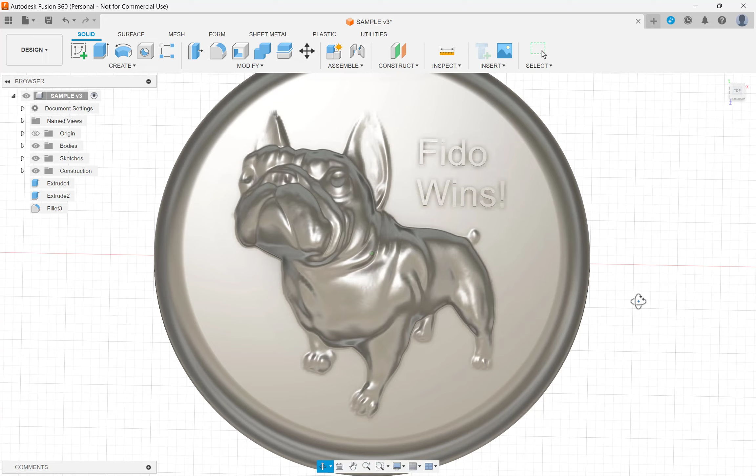How freaking cool is this, guys? If you want to incorporate amazing relief models into your Fusion 360 projects as a solid body that you can use as part of any other design, this is the tutorial for you.

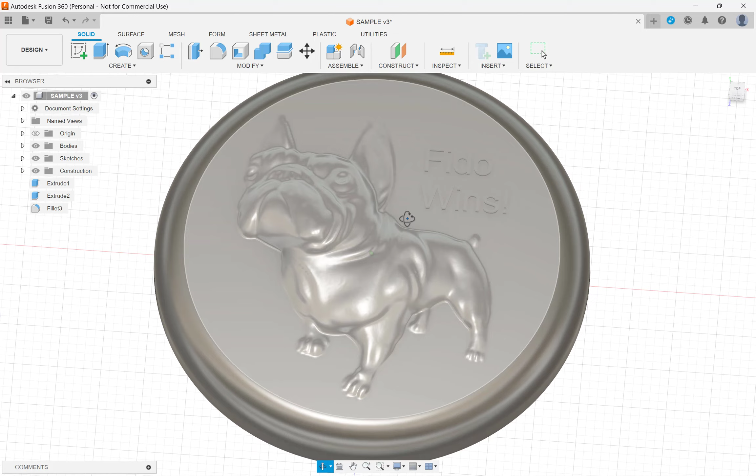In this tutorial, we're going to learn how to generate the relief model from Relief Maker, and we're going to bring that relief into Fusion, convert it to T-splines, and then use that to incorporate that into some other design that we have going on so we can then mill it or 3D print it. Let's get started.

Okay, so here we are in Relief Maker. We've opened up the model that we're going to want to bring into Fusion from a relief perspective later. And we're going to kind of rotate it and position it to where it's interesting and like we want it to be. And the first thing to note is you don't want the model to be right next to the edges. And in fact, might want to make it a pretty good amount. The reason is when we generate a relief, everything that's around it's going to be flat. And we're going to use this to our advantage later.

So if you zoom the model way in, you're not going to have a lot of flat areas around it, and that's going to be a problem for this workflow. So give it some breathing room. And the next thing is to make sure that the output width and height are at the absolute maximum of 1,000 and 1,000. And this is a dense mesh in terms of Fusion 360.

And as a result, 1,000 by 1,000 is the absolute maximum, and it's going to take a lot of processing time down the road. So if you can get away with lower output widths and heights to get the results that you want, definitely do that. But we're going to go with 1,000 by 1,000, and let's press Generate Relief.

And we'll look at it from the side, and this is looking pretty good, but we want some of this detail to be a little bit more pronounced. So let's change this maybe to 85% height scale. We'll regenerate it. And that's looking pretty good. So at this point, we're done in Relief Maker.

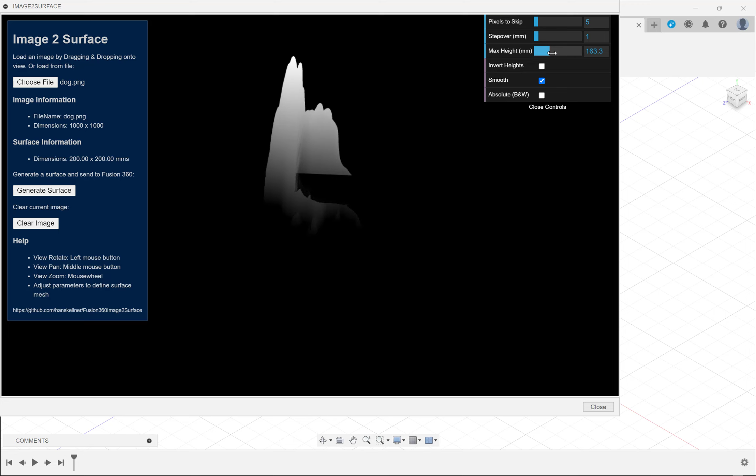So we'll click Choose File. We'll navigate to the Relief Output folder, and then we'll choose the image that we made. And we see that it comes in. So the first thing that you probably want to do is figure out how tall you want this to be. And changing that value, you can see kind of a preview. We're going to want this to be 35 millimeters tall.

The next thing that we want to do is kind of look at the pixels to skip and the step over values. If we just temporarily increase the step over, you can kind of see the mesh density that we're going to get as a result of this based on the pixels to skip. And so changing the pixels to skip effectively ignores some of the data in the image that we're using.

You don't want to have a 1000 by 1000 image with 0 pixels to skip. You can kind of just intuitively sense this insane mesh density that we're going to get. And this is going to make processing later extraordinarily time consuming. So either use a smaller input image or make sure that you skip enough pixels to where the mesh density is not totally out of control. In our case, maybe we'll choose 3 as the pixels to skip.

And then once we've chosen the pixels to skip, which effectively controls the mesh density, we want to figure out how big this thing should be. So you'll notice over here, we have our dimensions. This is the output size that we're going to get in millimeters. And as I change step over, the output size decreases.

So one thing to be aware of is that you may be tempted to believe that the dimensions are from the left side of what you can see to the right side. But keep in mind, this image is a square, and there's space around it that we're not really seeing represented on this image.

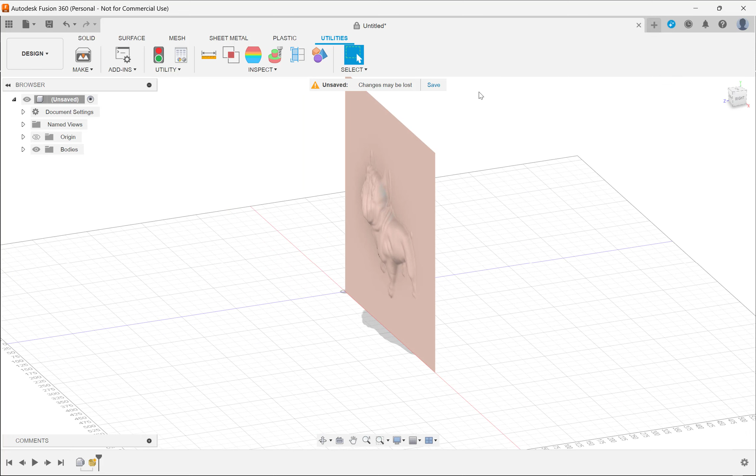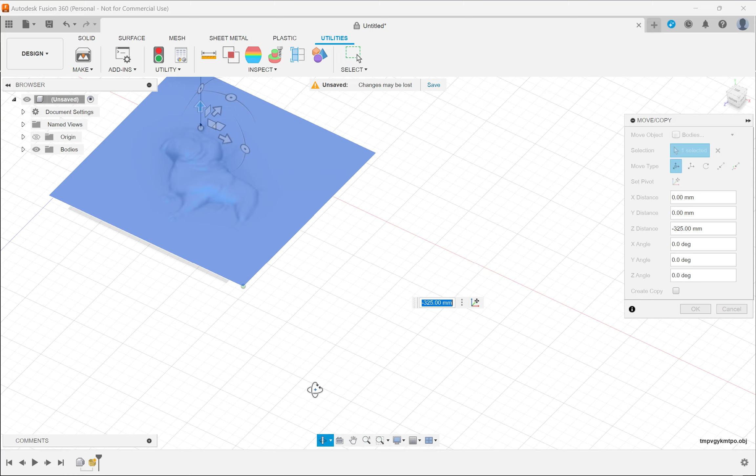And so the first thing that we want to do is kind of orient this in a more meaningful way. Let's say we're going to put this on a CNC machine. Well, we're going to be machining it from the top. And so we probably want to rotate this so that it's facing upwards. And for the workflow that we're going to use, and yours might be a little different, we're going to put this just above the ground plane. And we'll see why in a second. And then as the last step, maybe let's center it.

And we'll press OK. So now we have the mesh imported. We verified that its quality is good enough for the way that we're going to machine it. Otherwise, we might use a higher pixel density. And now we want to be able to do something with this thing. And the way that we're going to do something with it is by converting it to T-splines.

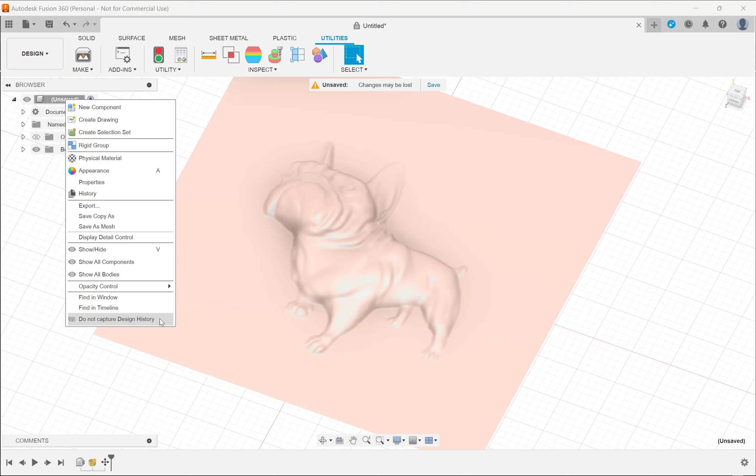So we're going to right-click, because we don't see the form menu up here. Right-click on the top node, and we're going to do not capture design history. Click Continue, and this is enabling the form object up here. So click that, and we're going to left-click our mesh to select it. Utilities, Convert, and then click Quad Mesh to T-splines.

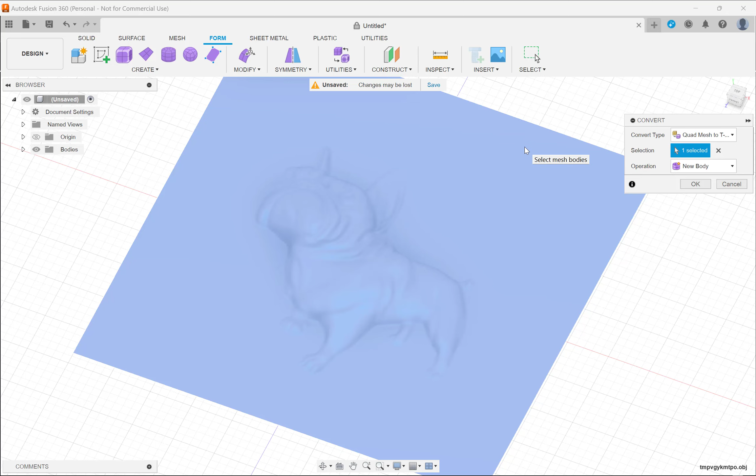Now, this is a process that can take a long time. If you're doing a 1000 by 1000 pixel image, the absolute maximum, and you have a skip pixels value of 1, so you're getting the full density, this step may very well take 45 minutes, right? So you want to use realistic values. In our case, it probably won't take super long because we have a skip value of 3. And so we're processing a much smaller image. So just be aware, this step is the one that can take forever, depending on how extreme of a resolution you're using. In any case, press OK and grab a cup of coffee.

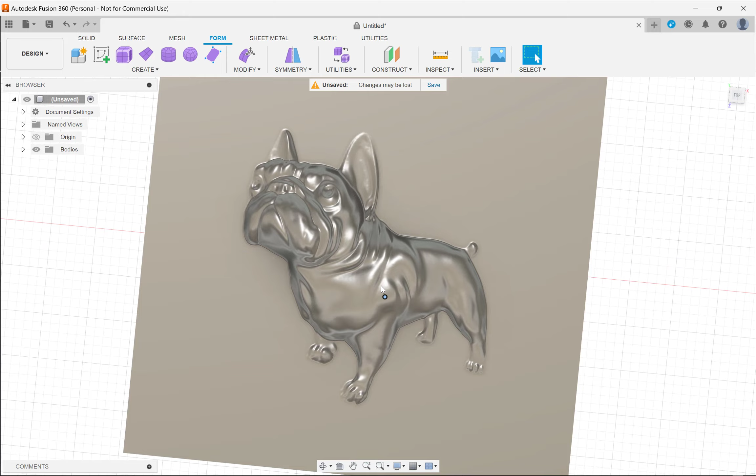All right, so this processing step, you can see it's now completed, probably took us 2 or 3 minutes, right? If you use a reasonable sized image or step over, it's not too bad. And we can see the quality is just outstanding. This is going to turn into something phenomenal. So now the question is, what do we do with this thing? Well, there's probably lots of different ways you can use T-splines, but the approach that we're going to take is perhaps the simplest. And we're going to use it as the basis to trim a solid body.

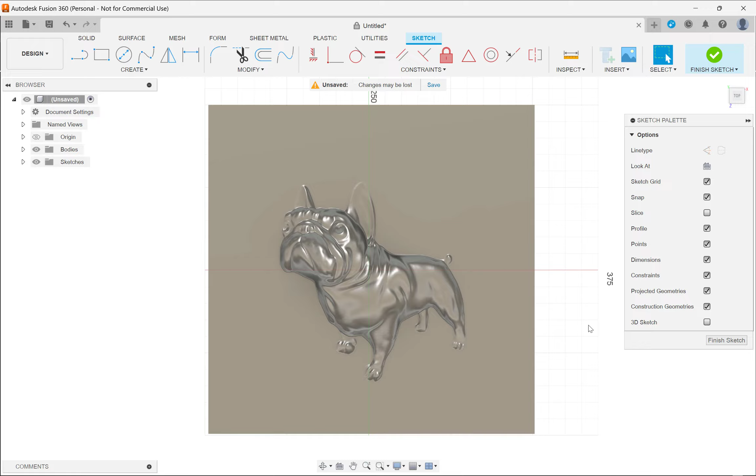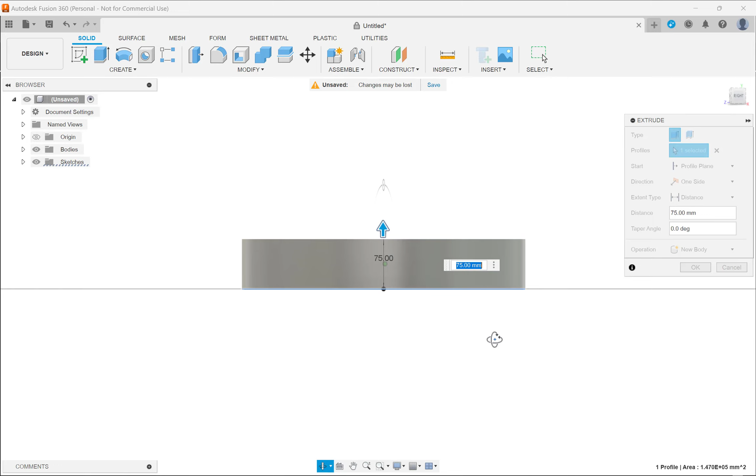And so we've entered sketch mode on that plane below. And we're going to create just a circle in our case, but you may be making a pendant or any number of different things. And we're going to sketch something, and we're going to extrude it past the top so that the entire relief is fully enclosed. And we're going to press OK. And at this point, we are very close to the magic happening.

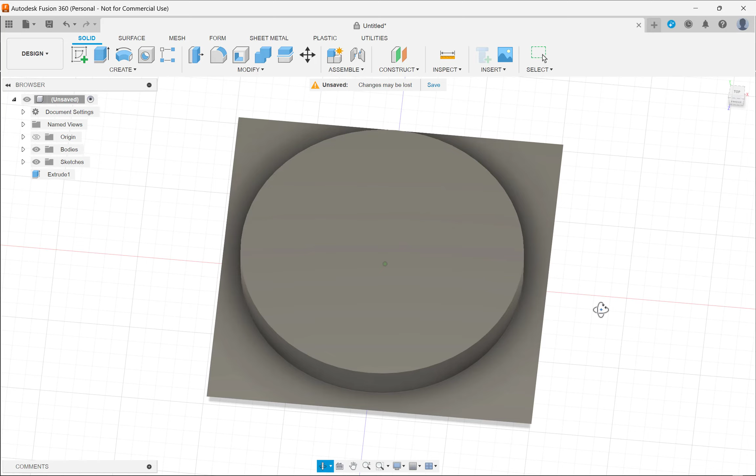We're going to go to Split Body. The body we're going to split is this cylinder or whatever you've made. The splitting tool is going to be the T-spline. And now we're going to press OK. And just like that, we are ready to rumble. Let's go over to our bodies. We can see we have an additional body because it cut that one in half.

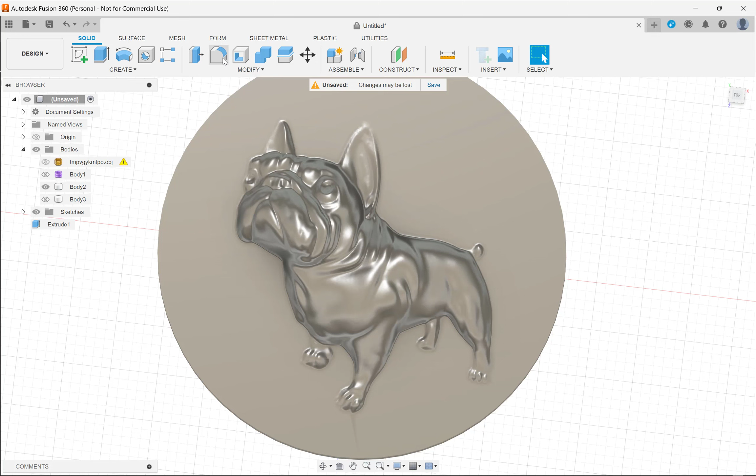So let's get rid of the top. And let's get rid of the T-spline. And this is the beautiful result. Look how good that looks. This is now a solid body, and so you can keep adding more solids to it. If you were making a pendant, you might make a necklace ring here to hold it. You can put text on it. If we wanted to fillet this edge, we could easily do that, maybe 30 or 20.

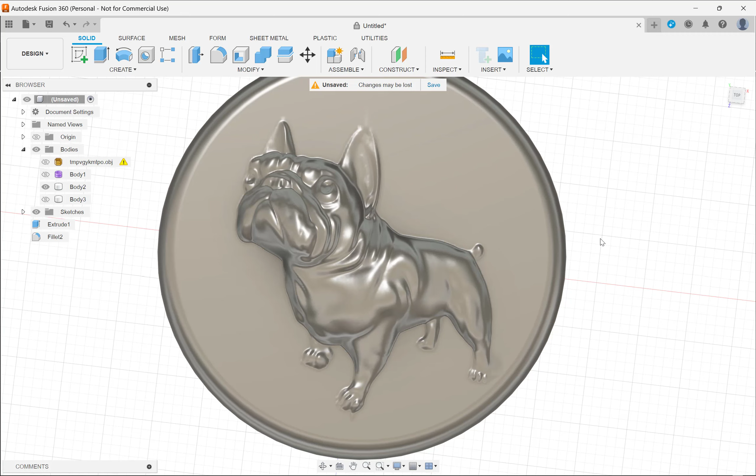All right, so you can treat this just like any other solid body. It's ready for machining, further design work, incorporation into other workflows that you might have. And it's really that easy. The longest part of this whole process is just waiting for the T-splines to generate. But otherwise, super simple, amazing results. Your work's going to be astonishing. This workflow just lets you incorporate such artistry and interesting designs into your otherwise perhaps prismatic Fusion models to take your designs up to the next level.